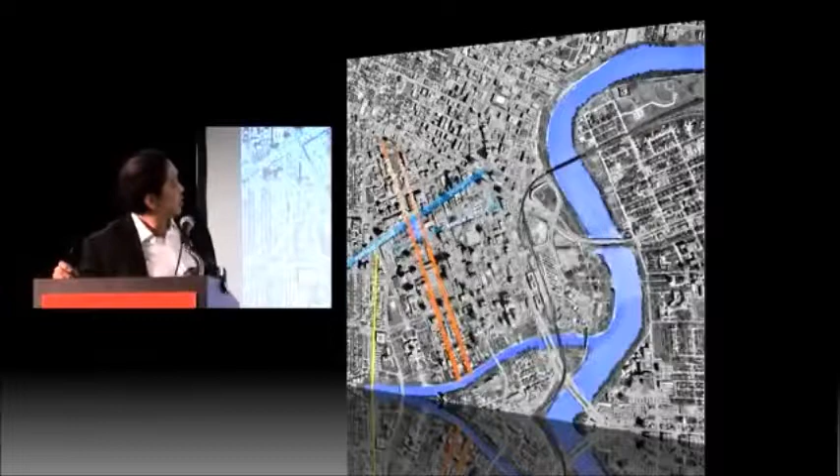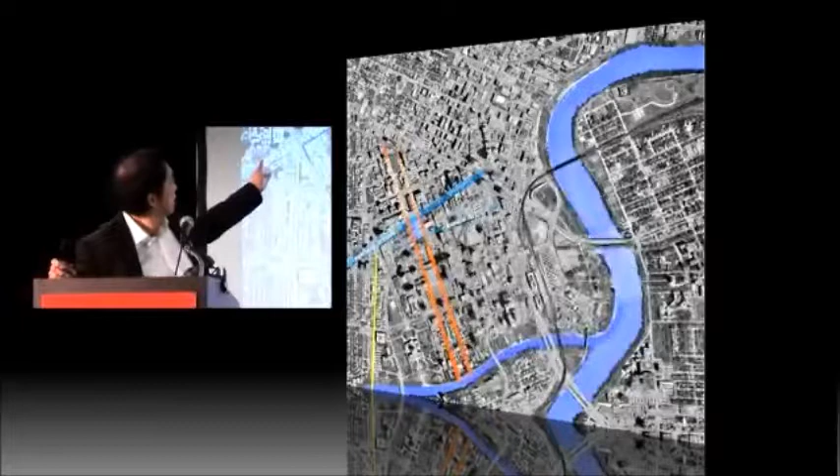This is Winnipeg with two rivers, the Red and the Assiniboine, and Portage Avenue, which really wants to be Michigan Avenue. It has Portage and Main, and Hydro picked the site dead center because Winnipeg needs a lot of revitalization. They picked it on Portage, also on the Graham Avenue Transit Mall, which becomes a key factor because we're consolidating 2,000 people who are in about 15 locations in the suburbs. So when Winnipeg Hydro was taken over by Manitoba Hydro, the mayor of Winnipeg negotiated the idea that they would build their headquarters downtown, and Manitoba Hydro agreed, understanding it would have a huge impact on the economy and culture of downtown.

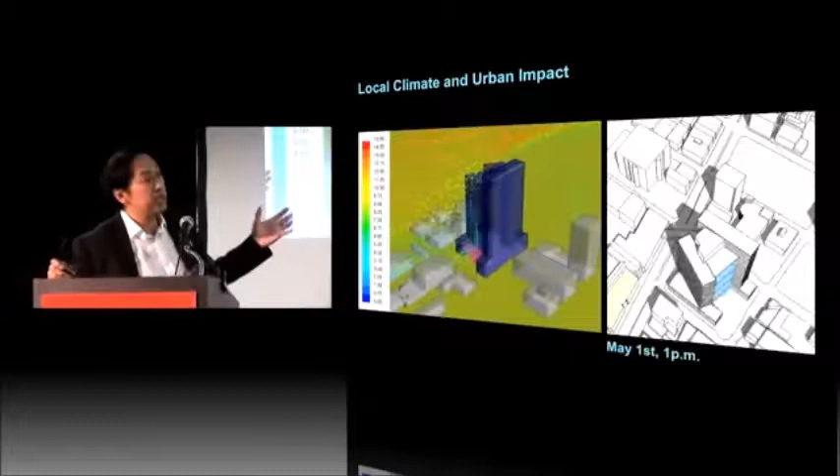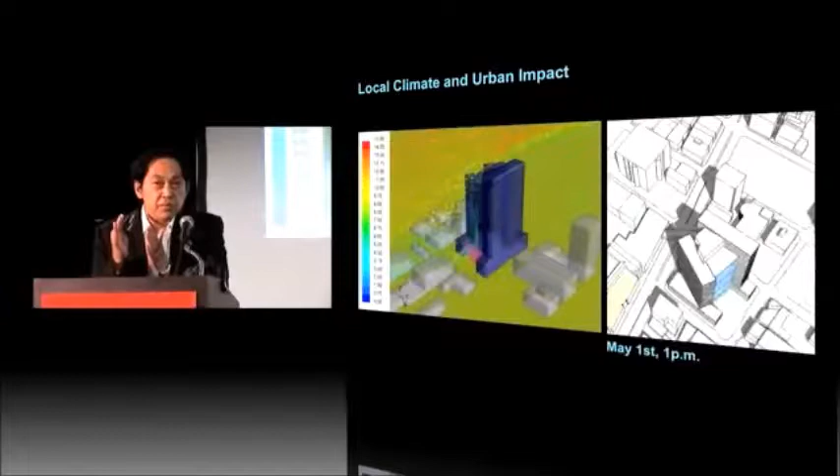These are Transsolar diagrams. It looks like the Battle of Troy, but these are arrows indicating the wind coming from the south, and the formation of the building, which has been described as a capital letter A, and some people describe it as an open book. It sits on a podium which is 2 and 3 stories. It has its narrow edge on Portage Avenue, almost like a flat iron building. Within the capital letter A there's a west loft and an east loft, and down the middle are all the things that make this building healthy and sustainable and drive the ventilation system.

This is it. You see the river, Portage, Graham, Transit Mall. 95% of all the buses come through transit, and now 50% of the Hydro employees coming downtown are taking the bus. They're saying they've never read as much in their lives.

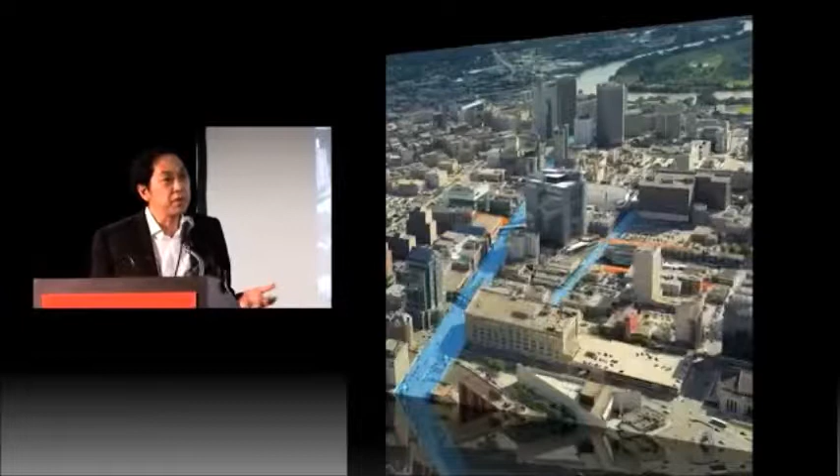We provided very little parking because one thing Winnipeg has is lots of parking. We did not put in a staff cafeteria, which really angered a lot of people, but what it did is it really affects the economy of 45 restaurants that are within 4 minutes walking distance.

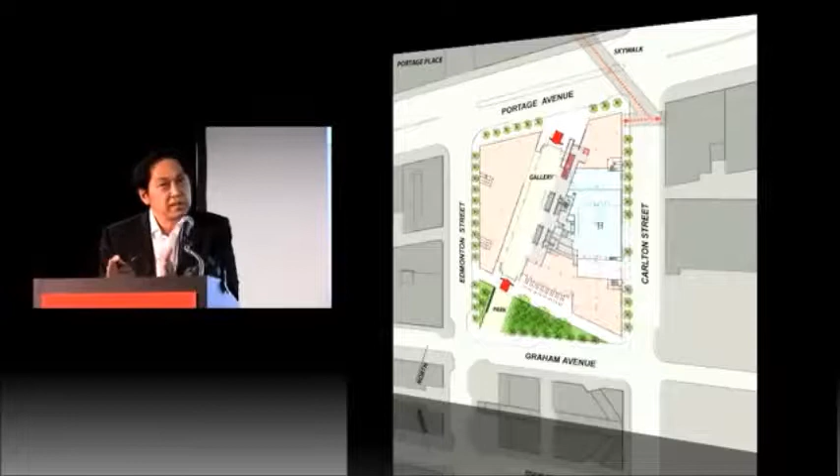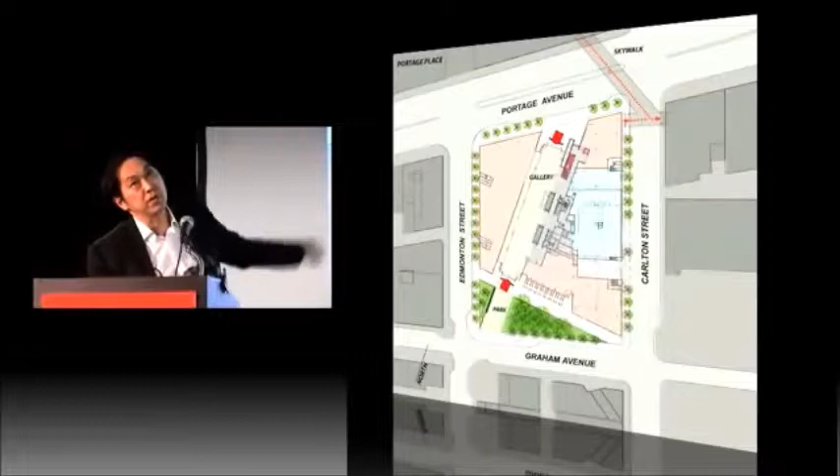The building actually splays and opens to the south because Winnipeg gets more sunlight than any major Canadian city. That's what Transsolar identified, and they said we have to harness that energy. So we splayed the building. The west wing becomes very public on the ground floor, linking the transit mall inside, has very little retail on it. We did not want to draw the city into the building. All the retail faces outboard, and we made a triangular park, which is great because it invites other users to participate on this site.

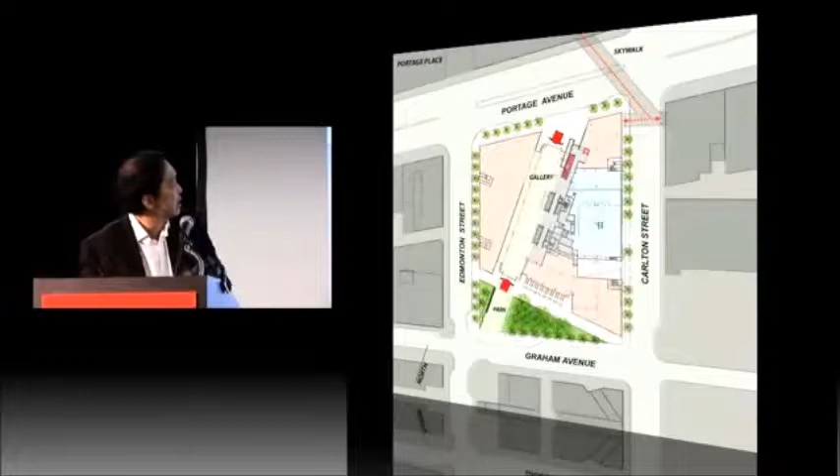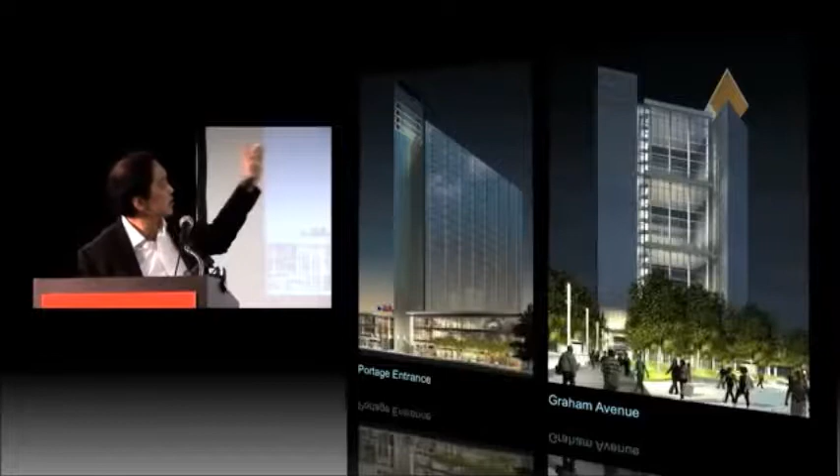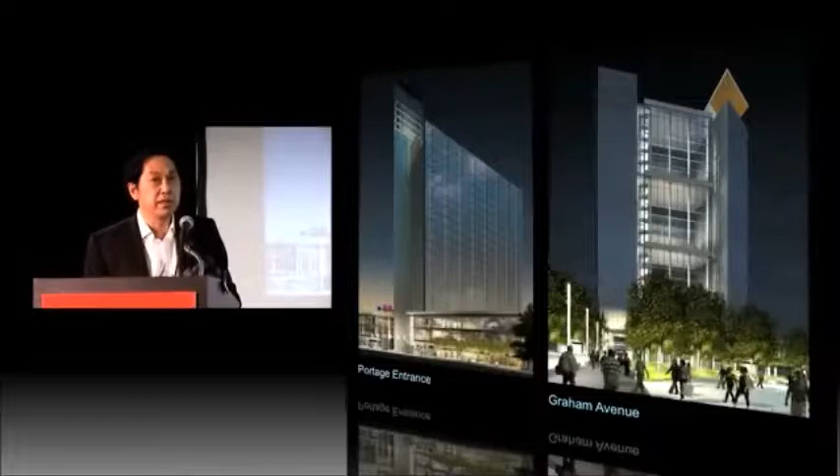Two renderings showing the open end of the A with 3 stacked atriums, related to an idea about a vertical campus at 6 floors above a base, and the Portage Avenue facade, which is very much like a flat iron building. It noses onto the street and has very little shadow impact. That's another reason we picked it. The podium really deals with a lot of the microclimate of wind.

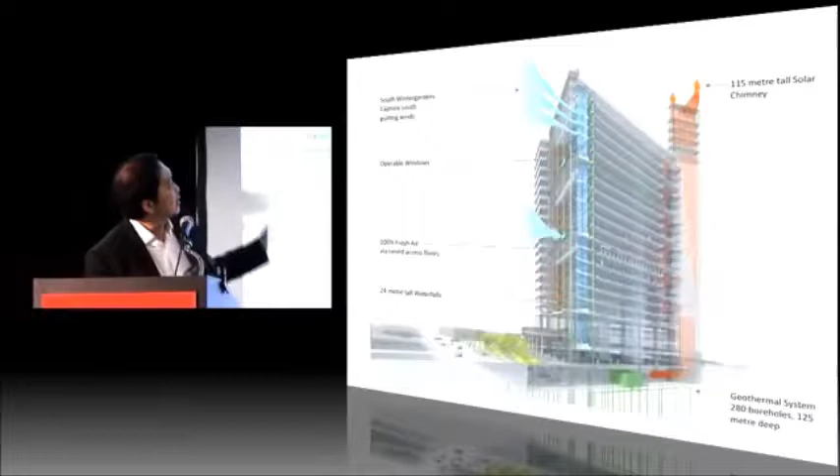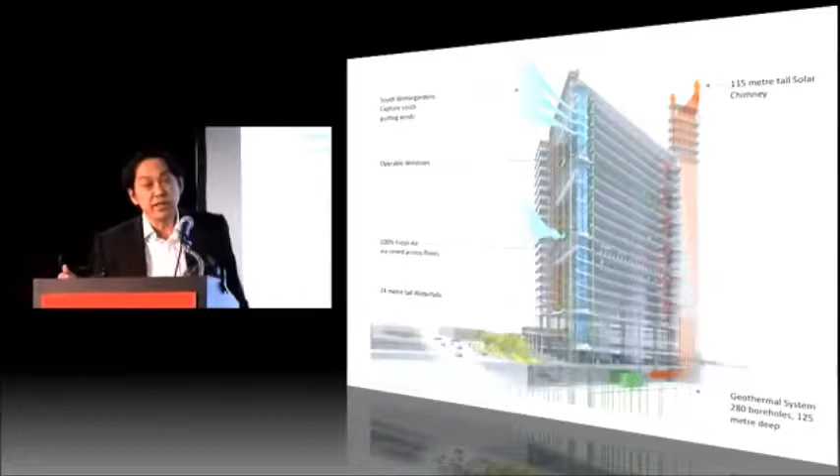A great diagram that we finally got to really understand what we're doing. We have decoupled heating and cooling from ventilation. It's a concrete high-rise building. We have the largest geothermal application in the country, 280 holes drilled to 400 feet depth at 15-foot centers under an urban site. There are 1-inch diameter pipes in tubes in the concrete, 10-inch concrete slabs, and the slabs are kept at 20 degrees Celsius year-round, no matter whether it's minus 30 or plus 30.

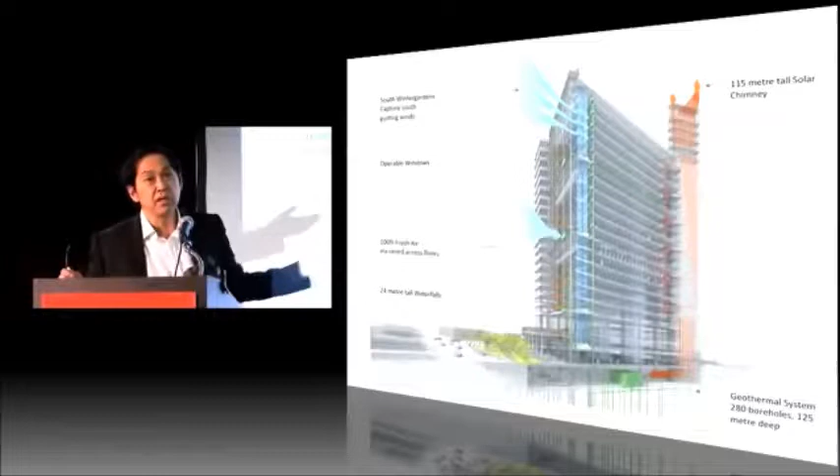We have 100% natural ventilation coming in because of the south prevailing winds into those atriums. It stratifies, we have rises. We have 100% raised floor, so it's displacement ventilation, and we have a very high performance building envelope. We have windows that open. We have basically buffer walls on the west face and the east face, and everywhere else it's triple glazed primarily. Then you see the solar chimney, which drives the ventilation system.

So air comes into the atriums, sometimes preheated if it's minus 20. It goes into the raised floors, it stratifies, it hits bodies, it warms up, and is drawn across the building to the solar chimney. We have a passive preheat function in the top of the chimney, which is basically a whole grouping of hollow section steel tubes with sand in them. That's passive preheating. They're painted black.

And it becomes the icon. So when people were talking about spires and heights, ours really drives the environmental systems of the building besides being the tallest part of the building. Here's our performance. We're shooting for a 60% reduction in energy consumption from the Model National Energy Code building standard, and we're actually overachieving the target.

We're achieving it in a way that will drive our energy usage down below 90 kilowatt hours per square meter per year, when most buildings in Winnipeg and around most of North America are like 500, 600 kilowatt hours per square meter per year. This is really big and really green.

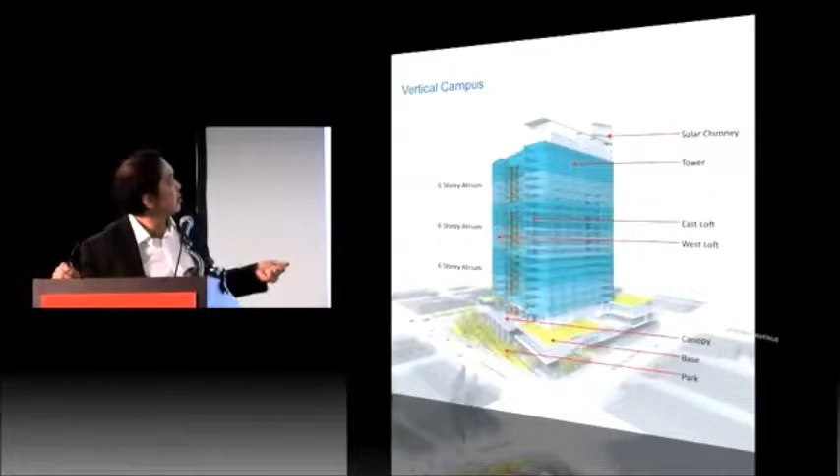And the way you do it is you go passive. This is the concept of the vertical campus: 3 prototypical 6-story atriums subdivided with north atriums that are 3 stories and usable year-round, with interconnecting stairs in each of the atriums. The west wing, which is public and open, some people have called it the cathedral, a canopy that actually mitigates the south wind as it comes down the face of the atriums, and we protect the park.

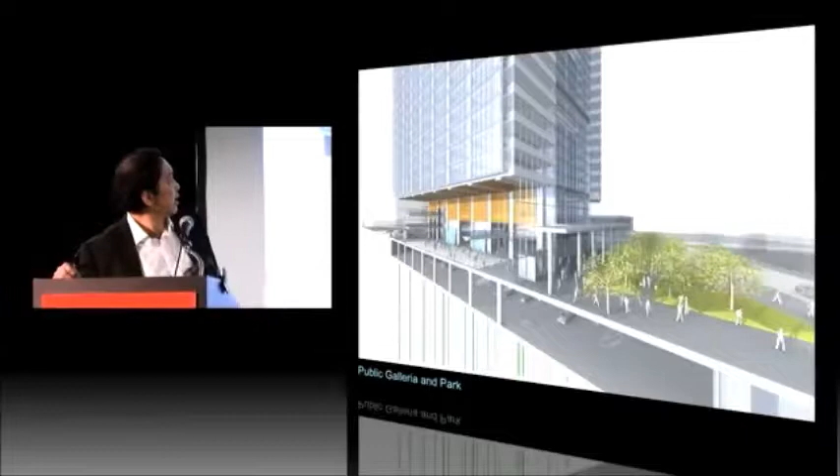The gallery, the green roof, the park. We recycled 92% of the material of the buildings that were demolished on site. We sought a LEED gold and we'll get a LEED platinum.

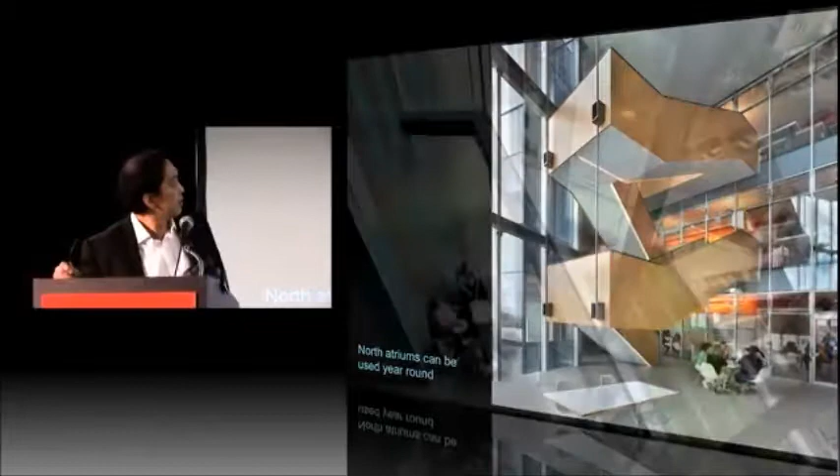The interconnecting stairs in the north atriums, people gather there. They're very, very comfortable, and you look over the green roofs and towards Portage and Main. It's about teams of people—that's why you make a sustainable building. It's not about energy consumption and all that, it's really about people, because that's the highest cost of any organization. Everybody knows that. And it's the creative talent, the knowledge workers coming downtown that give Winnipeg a chance.

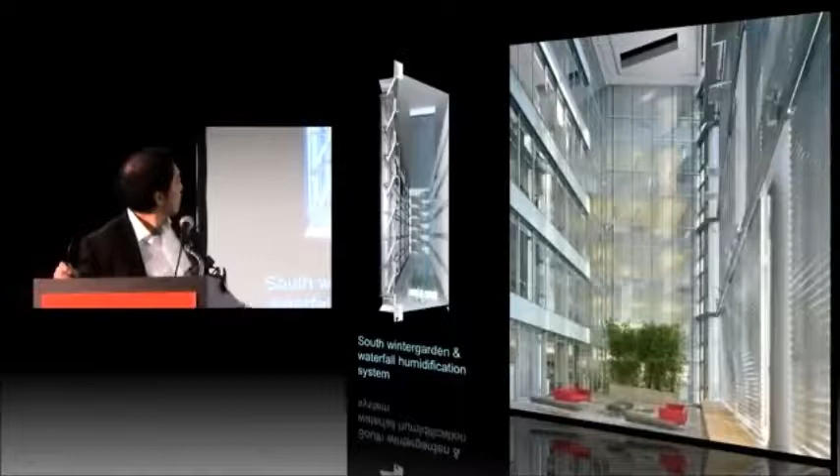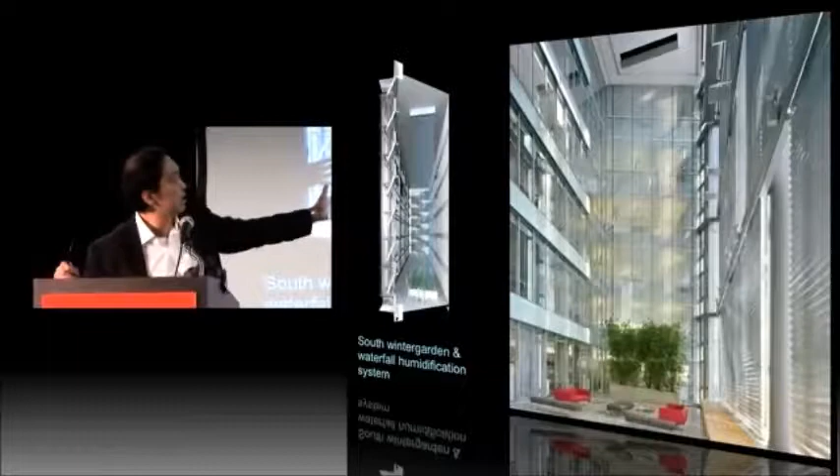The atriums, this is really great. This is our humidification and dehumidification in the south atriums. Unitized curtain wall, double glazed on the outside, single glazed on the inside. These are the lungs of the building. These are winter gardens.

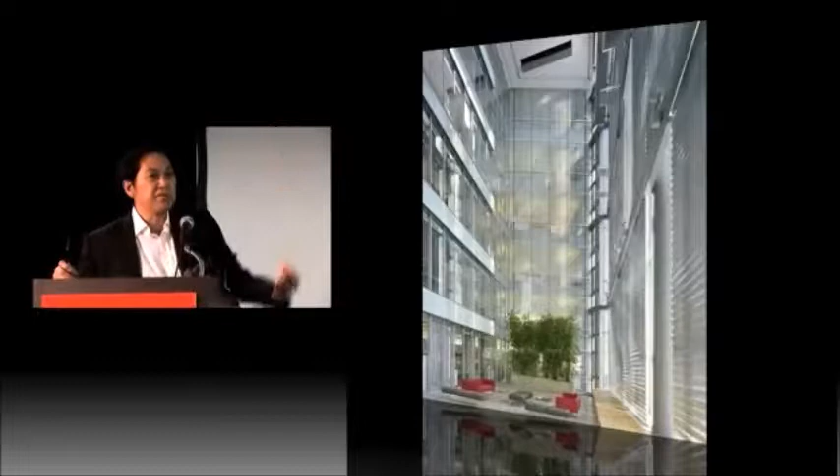Hope to run this little film next. See if it goes. Does it go? No, they're searching. Okay, skip it and go to the next. Go back.

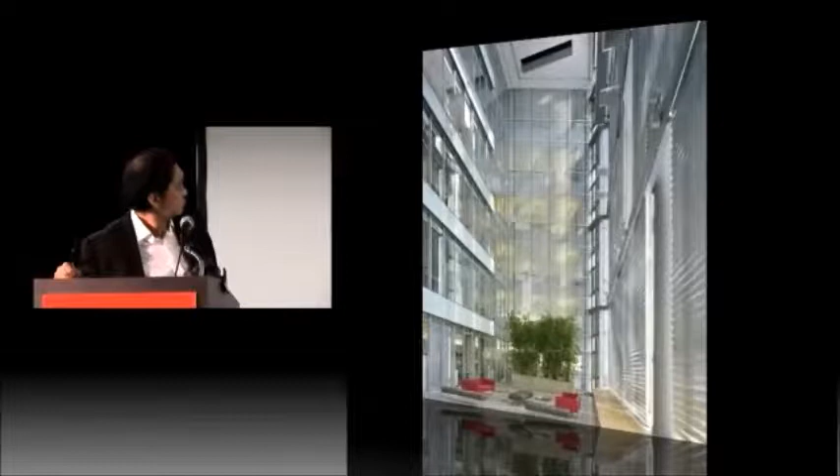There it goes. So this is what I think the future is about—really about the integrated thinking, not only about environmental systems, but things which appear and are very much part of the environment we share.

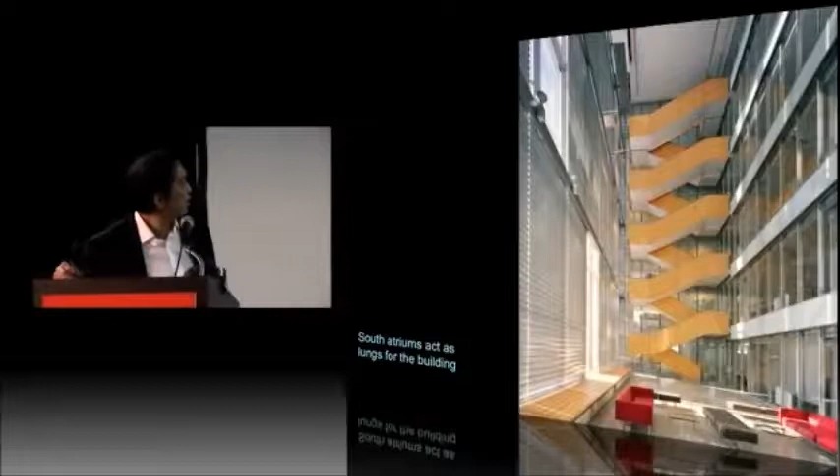There's the pit. We're very excited about that and the passive preheat of the solar chimney. I think those were real innovations within the project—the green roofs, the tower, the windows that open. It's an event in the city when the windows open.

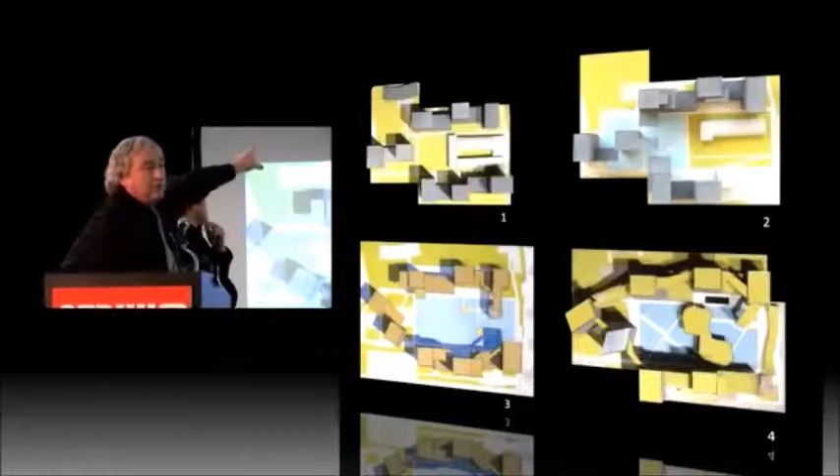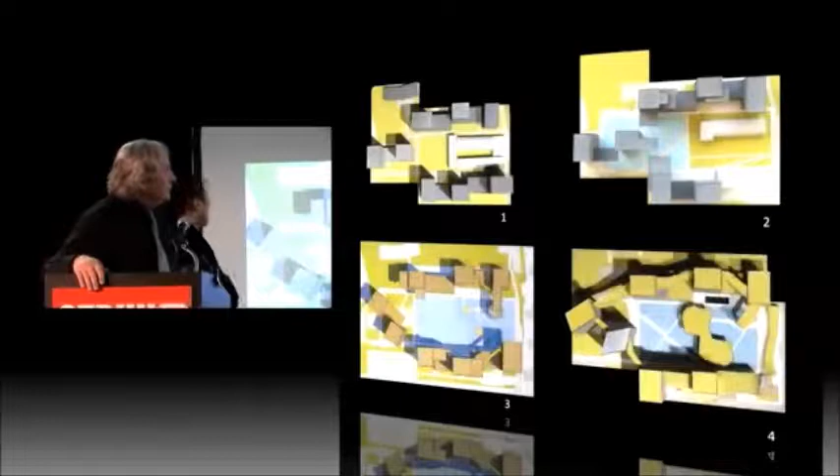The developer had a factory site. We didn't take any hutongs down, I don't believe in that. It was kind of a brownfield site. He had a zoning diagram of 8 towers, 800 apartments, and asked us to do a kind of skin job on the towers — you know, a famous architect does a skin job, something iconic. I said I'm not interested in that, if you would like us to do a very thorough visionary project.

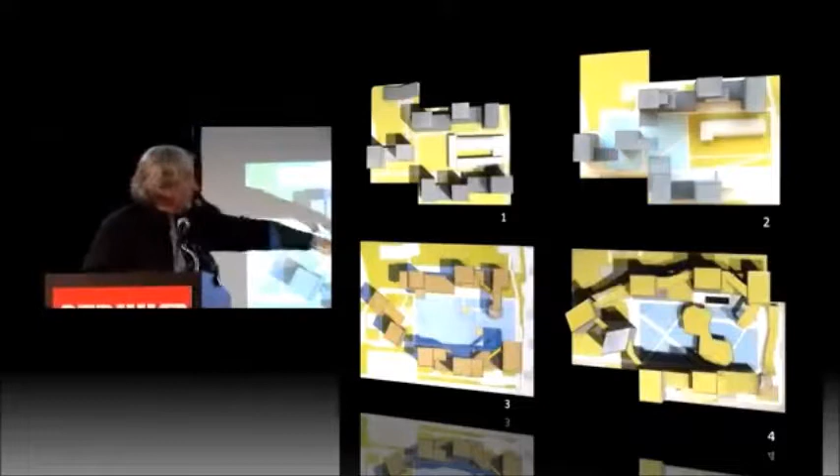So this is kind of process models. Finally, we added many things to the program, like a cinematheque right in the center, a hotel that wasn't in the program, and shops all around the base.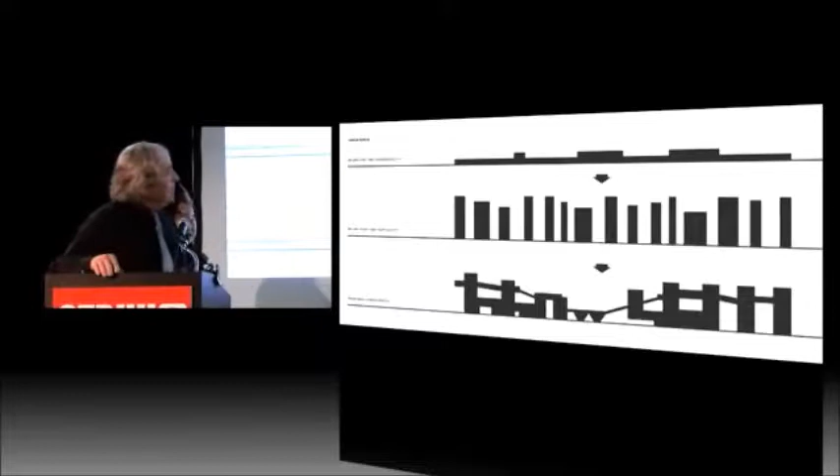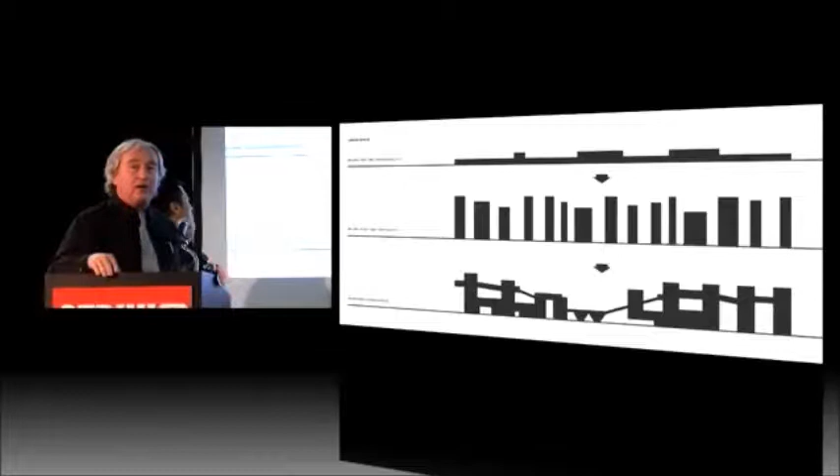Basically, the premise is that Beijing is a city that was once horizontal. Around 1949, Mao lifted the restriction that you couldn't build higher than the Forbidden City, meaning you could start building towers. But Beijing is becoming a city of point towers, and many of them are gated communities. This is wrong, we feel, and we want to make some kind of horizontal city that's much more socially connected and socially defining space. That's a key core drive.

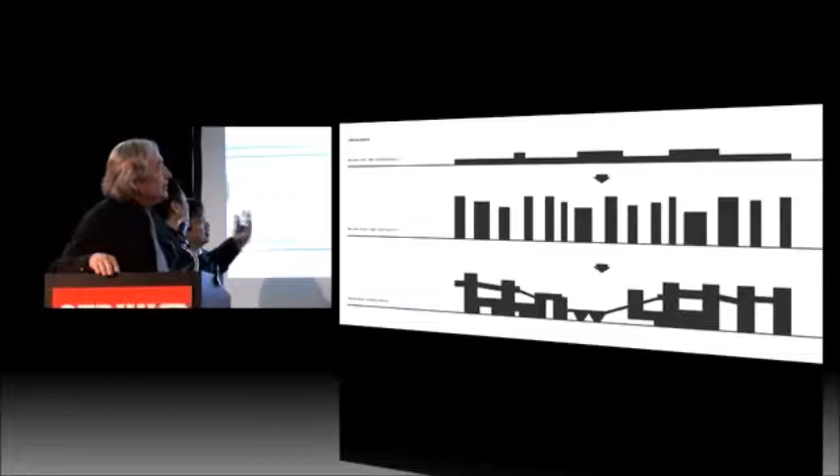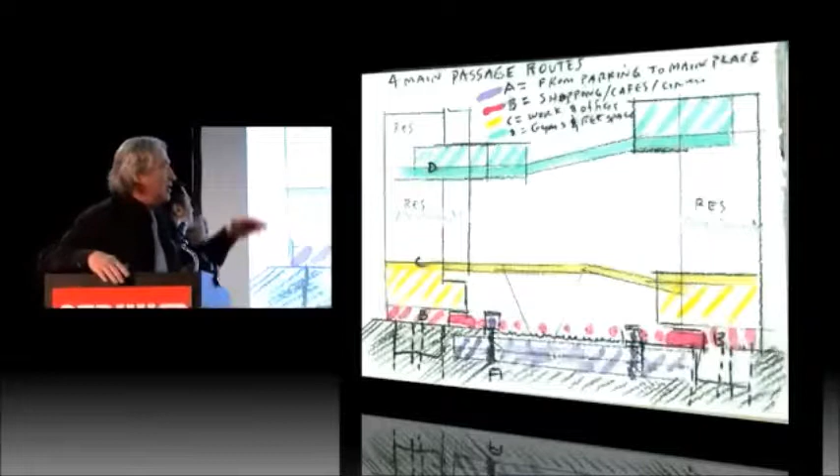So this was the first sketch — the idea of shops on the street, a secondary level maybe for offices, and a third level. This is very different than the problem of, let's say, Minneapolis and sky bridges. There's so much density in Beijing that you can have plenty of shops on the street, and our idea of porosity at the street is very important.

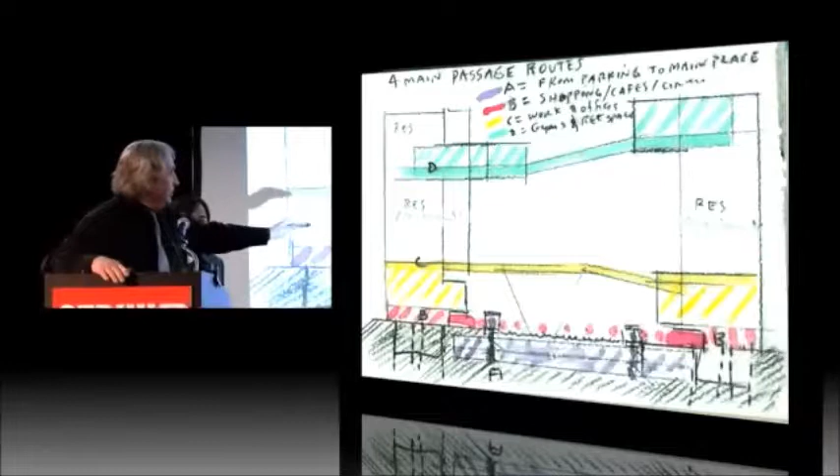I'm a professor of architecture at Columbia University. I do some museums and some houses. So this was a big piece of work — what we really felt is that we have to push it to the limit.

So we proposed all these different functions at the top. You can see there's a swimming pool, a health club, restaurants, cafes, a whole range of different activities, and you come up through the hotel and can go around the loop, a semi-public loop.

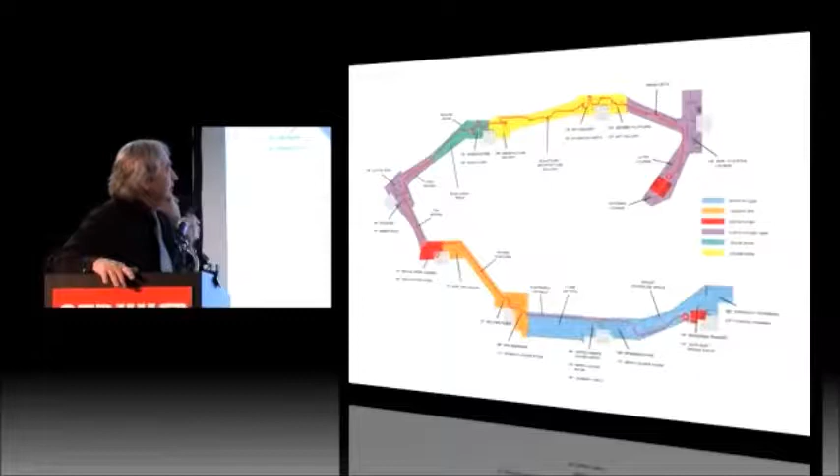The climate's a little different right now, but next — you can see the circulation. I won't go into detail, but it connects up and down.

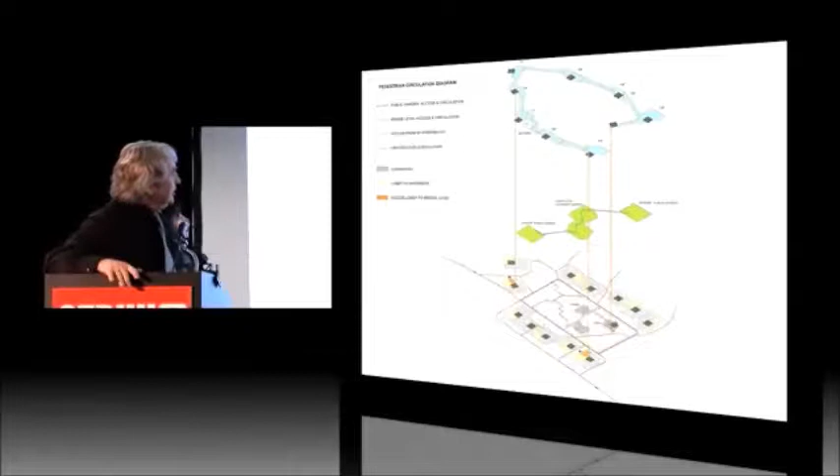Porosity — for me, a concept of a city is about porosity, being able to move through. Buildings shouldn't be so big. I say no bigger than a New York City block, 200 feet, and then you can move through. So all this is about porosity, moving in and moving out, so everyone can come in, go to the shops — the central spaces.

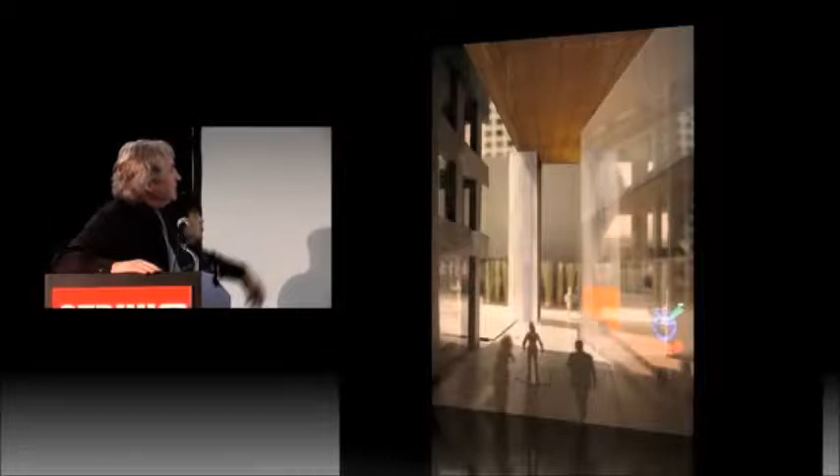There's the Cinematheque, 400 seats, 3 cinemas.

This has 680 geothermal wells, 100 meters deep. At the time, the largest geothermal array in China. And it's up and running, cooling and heating the entire project.

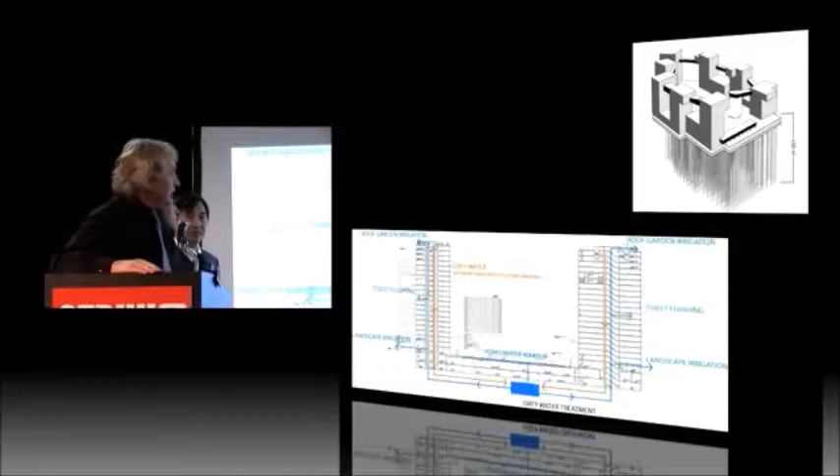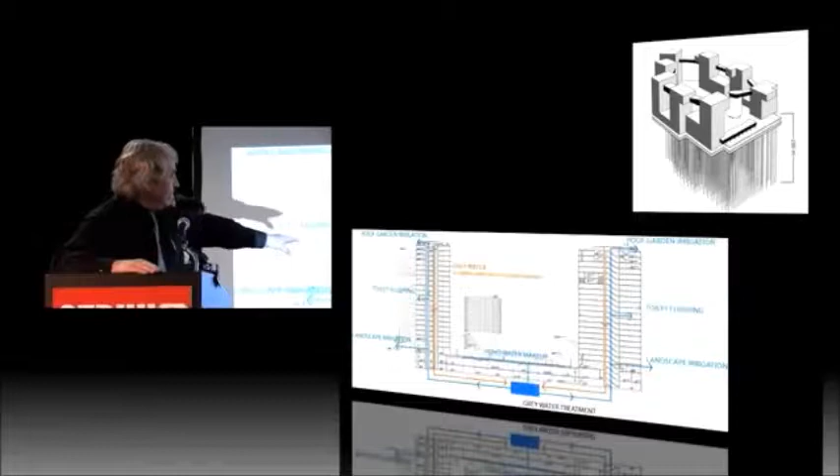Not only that, it has a gigantic ultraviolet filter tank, and every apartment has 2 plumbing systems. That means all the gray water is recycled. We have enough to make up the gigantic pond in the middle, and we can green-water all the landscape. When we did the calculations, we found, amazingly, we have enough to also flush the toilet.

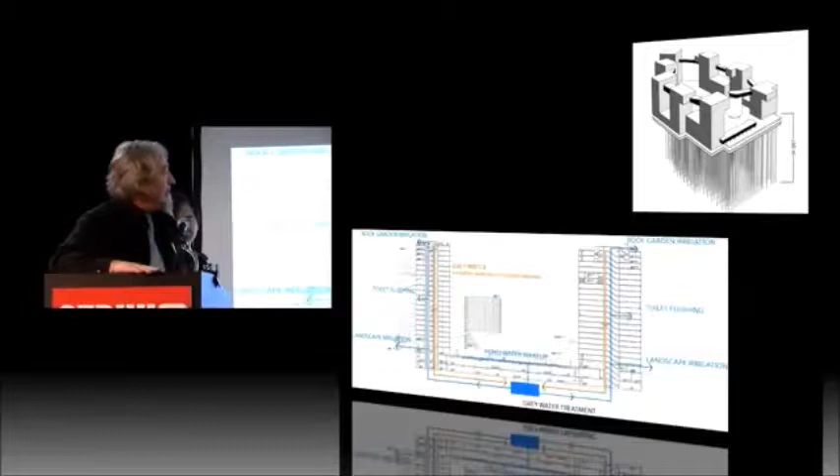Beijing is a place of water shortage. I think this is the future. I think every city is going to have to think about water, and this is a project that's a kind of model of that.

There they are putting in the radiant slabs. Matthias Schuler pushed us on this, and the client, that the heating should be in the slab and the cooling should be in the ceiling. That's very expensive, but they did it.

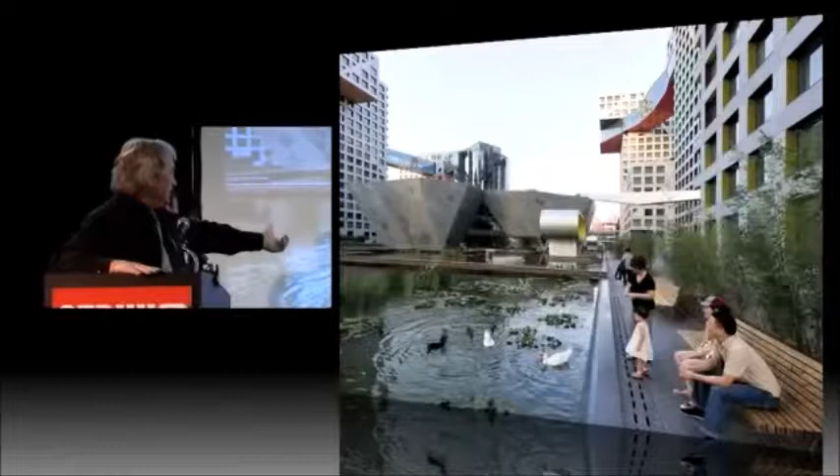This is the recycled water, and you don't smell anything. The ultraviolet system totally zaps it. The ducks love it—they would not be there if the water was dirty. So people are enjoying it. The water is working very well. This will freeze in the wintertime and become an ice skating rink.

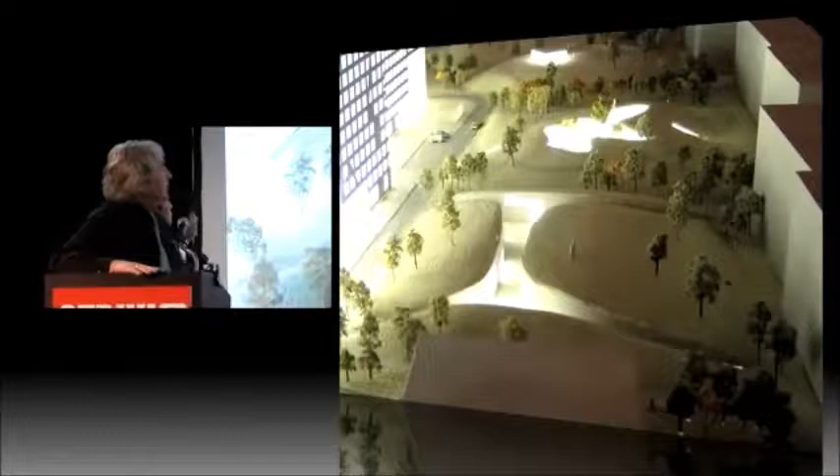We also did the landscape. There's not enough time for me to explain it, but it's the kind of 5 phases of life, from childhood to adolescence to middle age to old age to infinity. This is a kind of memorial place, an infinity space.

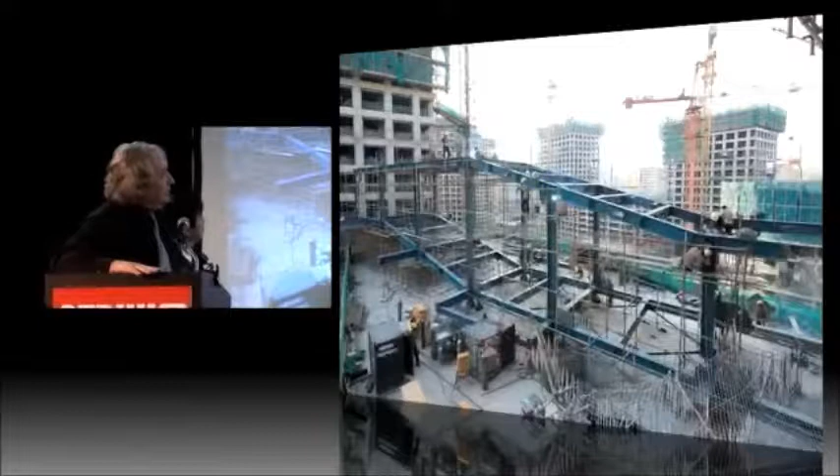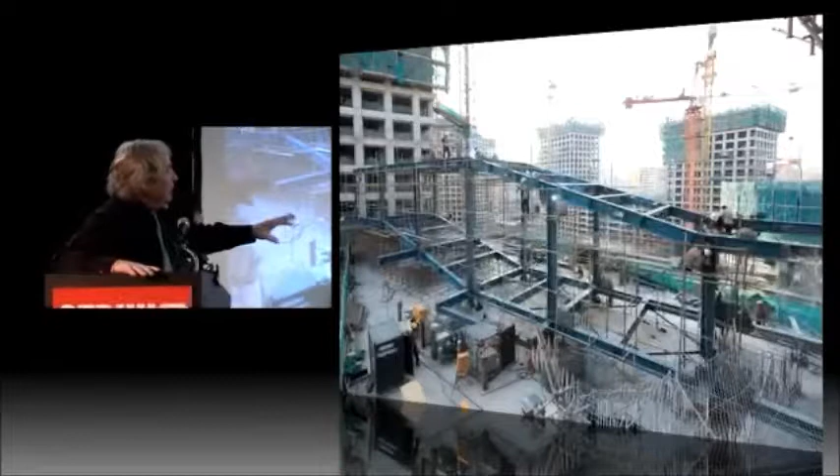The most difficult thing we thought would be the bridges, but in fact it turned out, because of our great engineer, to be the easiest thing. Just build them on the ground and jack them into place—300 tons on the ground, framed, jacked into place in 8 hours. Hydraulic crane jacks only about as big as this podium pulled the bridges up in about 8 hours for the longest one.

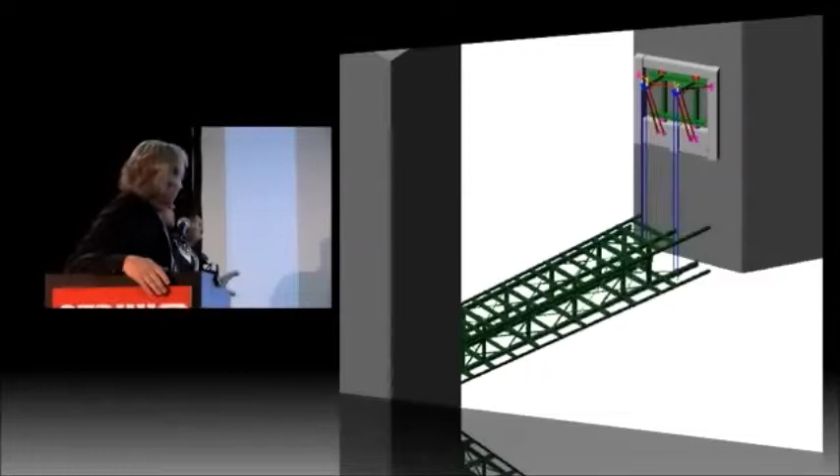Secured in place, no problem. And on Guy Nordenson's rockers for the earthquakes, absolutely no problem. So what we thought would be the most difficult thing was not.

This was the first time we could walk through all the 8 towers and do the whole circuit through—a wonderful feeling of space, of public space at the top level. And that's just a recent view.

The water garden, you can see. And the Cinematheque—because it's a cinematic experience, and I really believe you must experience architecture in the round and as a whole, this is really about forming a public space. It's not about a singular building, so the cinema is a kind of analogy of what the project is. Putting a Cinematheque in the center is really a key thing.

The detail, for me, the haptic realm, the phenomenology—that's why I love to be in this Mies building today, and I'm very proud that you have this ceremony in a building where one architect who had so many ideas always cared about the detail and the material. There's the bottom of the Cinematheque.

This is when you come out of the parking garage—you want to feel like you're in some place. So from the elevator, you arrive in these little kind of tea houses, but then you have a view of where you're at. It's something experiential. You're at the water garden, having come up out of a 2,000 car parking garage, but you arrive somewhere.

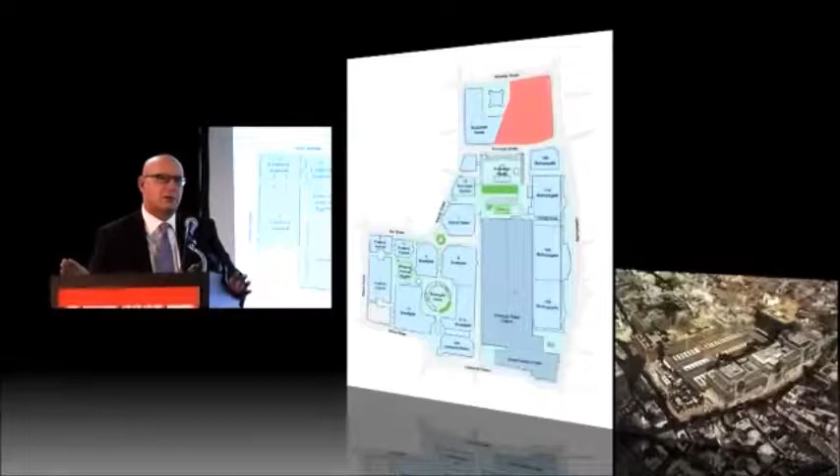This is a drawing showing Broadgate Estate and various buildings, Liverpool Street Station in the center, and the tracks arriving into the station from the north, which leaves the bulk of our site as an open site. It was an air rights site, so the project was really about creating and healing a scar in the city, creating a site where one didn't exist before.

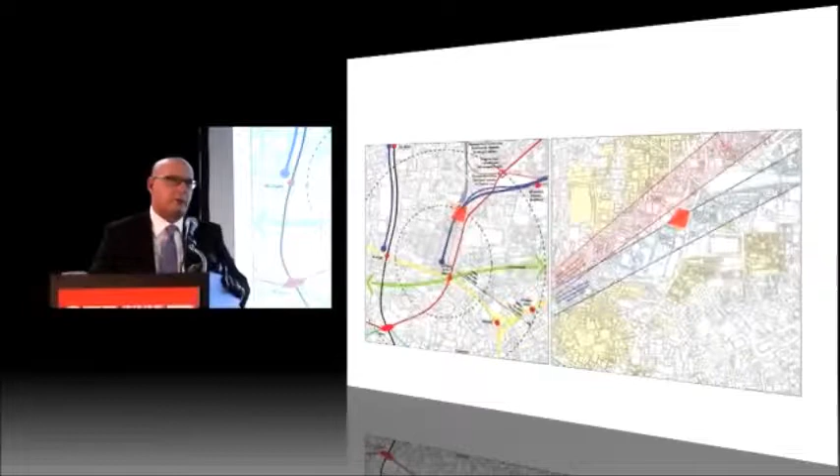As Jeff mentioned earlier, the project was envisioned as a 13-story ground scraper. However, when the market started to change, we looked for other opportunities to go high, which left a very small sliver of space that would allow us to place a tower.

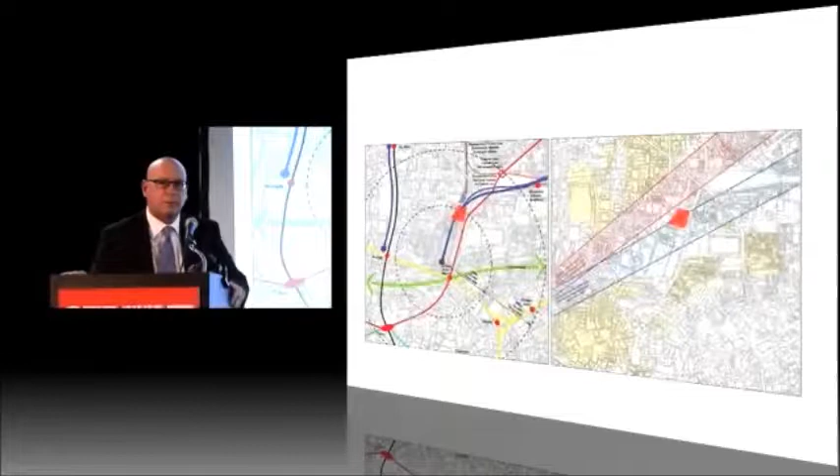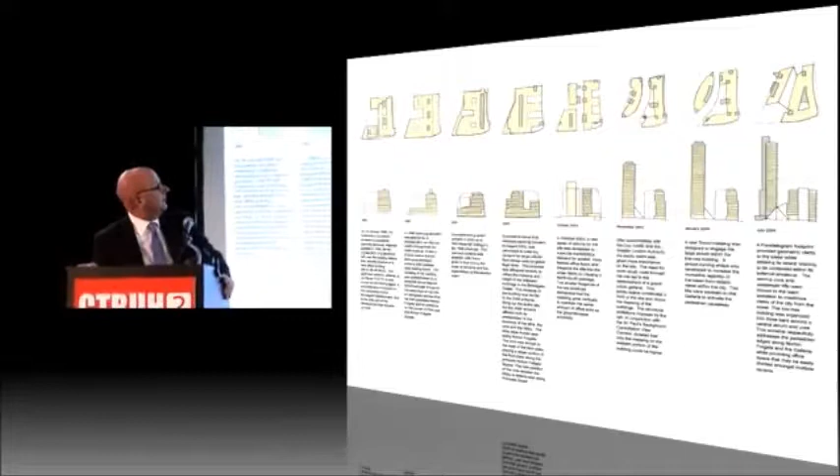The various planning consents we received took about 15 years of time. As we heard this morning, these things are incredibly expensive and take a great deal of time to acquire. But finally, in 2005, we decided to make a move forward.

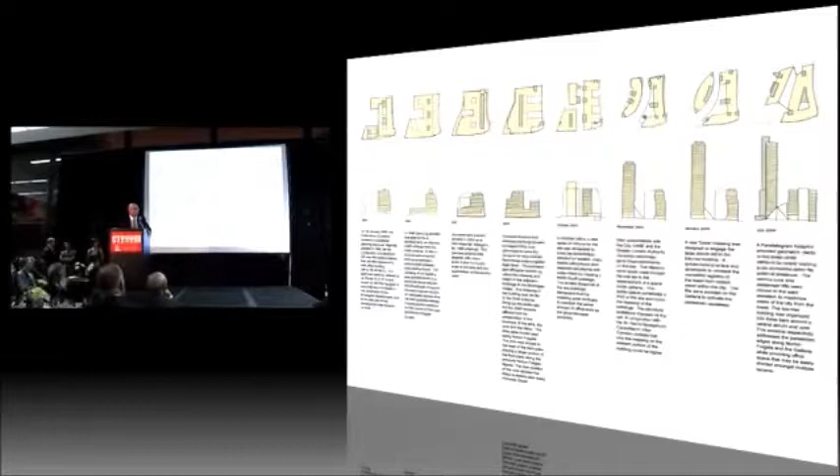A brief timeline of the project: we submitted for planning in February of 2005. This is the largest speculative office building ever undertaken in the City of London. We actually started construction only 9 months after submitting for planning - we didn't even have planning consent before we started on site. The steel was topped out 19 months after the beginning of construction, and practical completion was 33 months later in August of 2008.

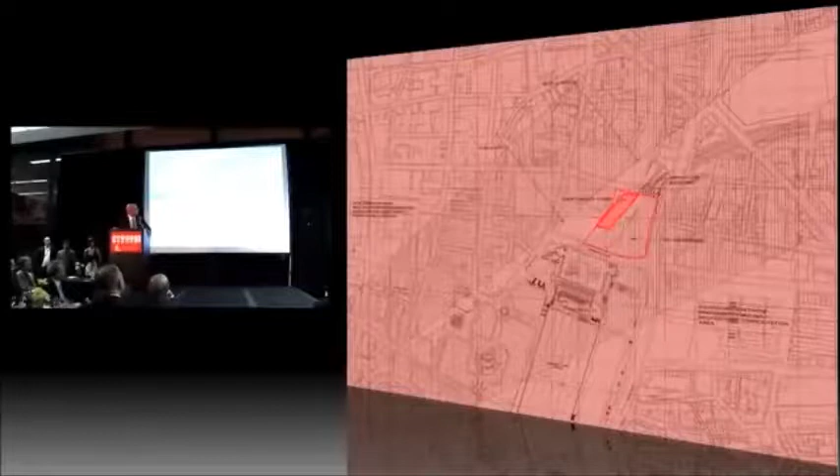A detailed image showing the site specifically with the view corridor, showing really the only possible location for a tower on that site. The ground floor plan shows the 2 various buildings - the tower on the left and the 201 building on the right.

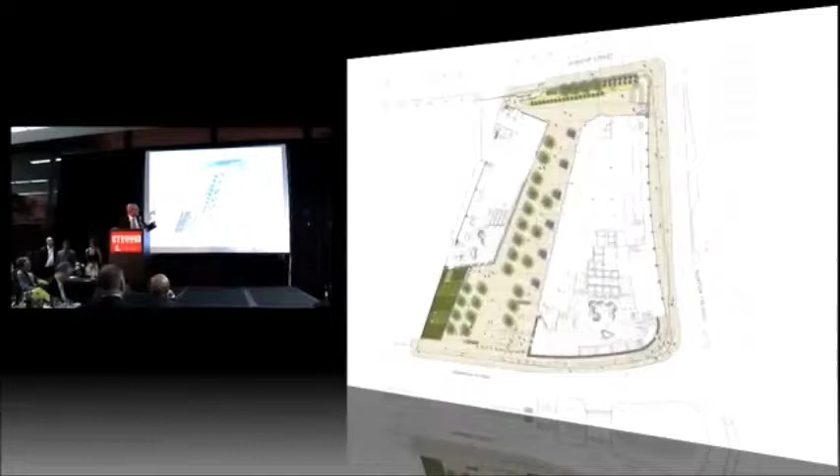The 201 building on the right is a 13-story building. Both buildings comprise about 400,000 net square feet each.

The section here shows the tower describes one of the other major constraints - almost the entire tower is built over the raft, which means it doesn't have a basement. There's no place to bring things down. As the raft was built, it was designed to support a 13-story building.

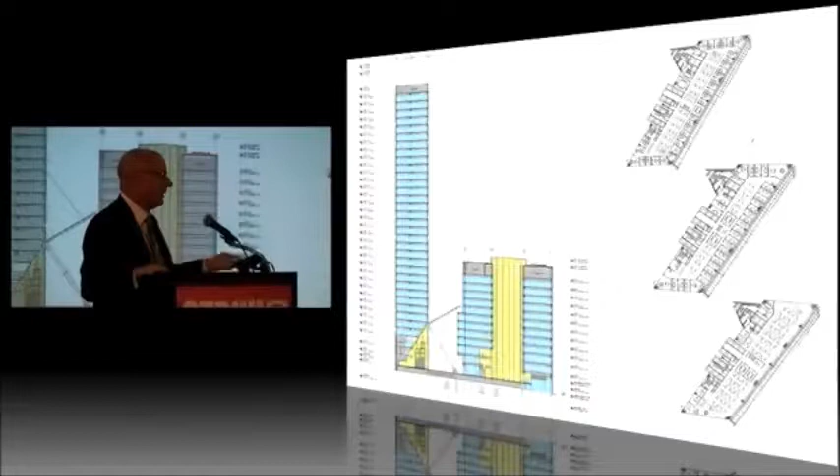However, after it was constructed, we came up with the idea of putting a tower there, and the challenge was finding a way to take all the load the raft was designed to bear and move it somewhere else. That gave rise to the idea of a transfer structure, which bypassed the raft entirely underneath the tower footprint and created the central Galleria space between the tower and the low-rise building.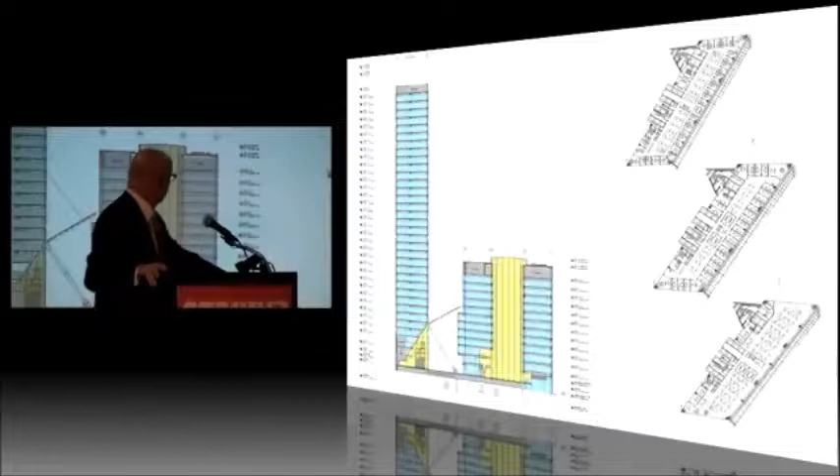A structural model showing the transfer structure. It's a bit odd looking, and it's also kind of interesting to watch the thing being built.

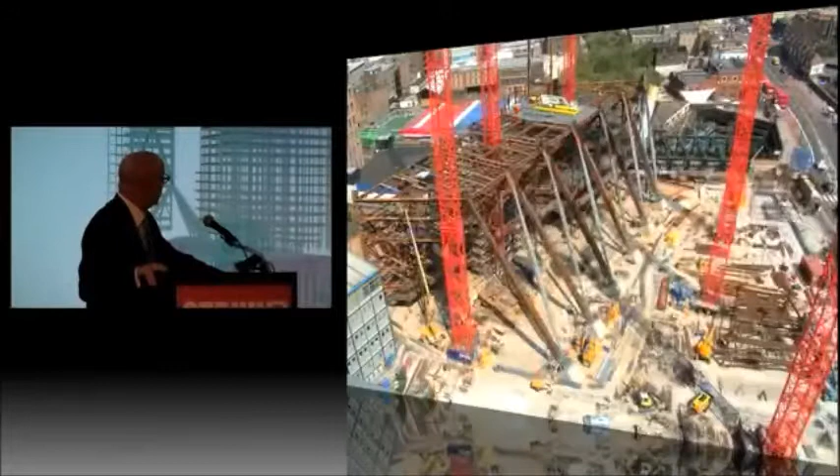Seeing an entire facade of columns being transferred out - not one column on the east facade goes straight down. They all get transferred out and bear right on top of the existing caisson line down below the raft.

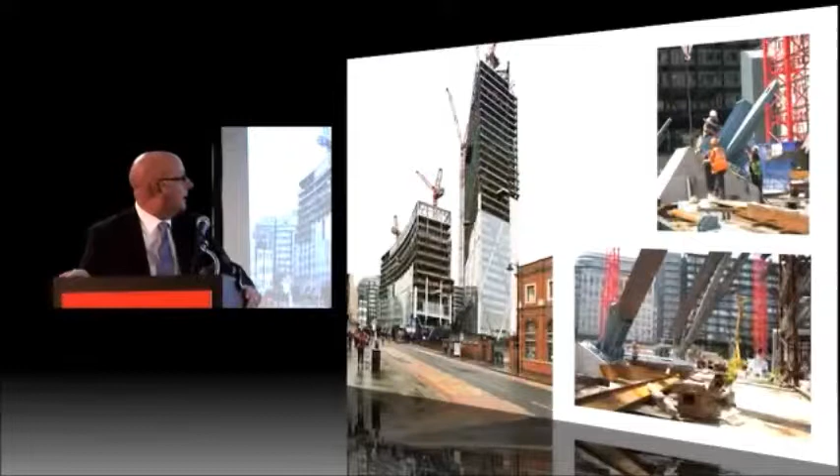We see the building going up. Another interesting aspect of building over a railway line is that every bit of structure sat on a rubber bearing to control the vibration created by the trains below.

Nothing could touch the raft that touched the building - all the slabs, all the structure, absolutely everything had to be isolated from the raft itself. You can see on the upper right-hand side one of the nodes going in with the vibration isolation.

And there's the building in its completed state. It is the third tallest building in the City of London at about 165 meters. Tower 42, in the middle, is about 183 meters, and 30 St. Mary Axe, or the Gherkin, is 180 meters.

The views from the north. The building draws its inspiration and architectural expression from its context. To the north of the building was a bridge of the Victorian era that nobody wanted to touch and is nearly listed - that's the image on the right-hand side.

And on the left, directly south of this, was another SOM project that did span the railroad tracks, which Bruce Graham did in the mid-1980s.

The materials chosen were stainless steel and glass for obvious reasons. The structure of the tower is an externally braced frame. We chose to clad the building with stainless steel to express what was going on inside the building, as well as the structural frame. Some early ideas were to actually design and use solid stainless steel structure and expose it to fire engineering, but for cost reasons that wasn't possible.

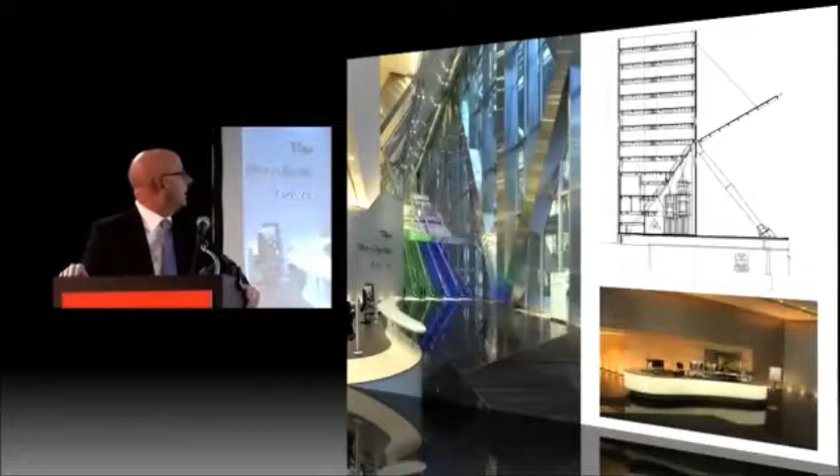Everywhere within the lobby, you begin to sense and experience the power of the structure above and the transfer. On levels 1 and 2, you look down into the lobby below, but nowhere within the lobby are you unaware of the Galleria space and the structure of the building. And I told you I'd be brief. Thank you.

Okay, and the final regional award we're going to present tonight is the project we heard about in the conference today: the Tornado Tower in Doha, Qatar. I'd like to invite onto the stage the owner of the building, Mr. Saeed Abu Odeh. Can we have a round of applause, please?

Good evening, ladies and gentlemen. It is an honor and a privilege for me to accept this prestigious award on behalf of QIPCO Holding and my design team. As the owners of this iconic tower, we have maintained a presence and involvement in developing the inherent characteristics of Tornado Tower, but I should like to take this opportunity to express my thanks to all my consultants who have demonstrated their ultimate dedication and professional expertise in order to create and fulfill our expectations for this dynamic project.